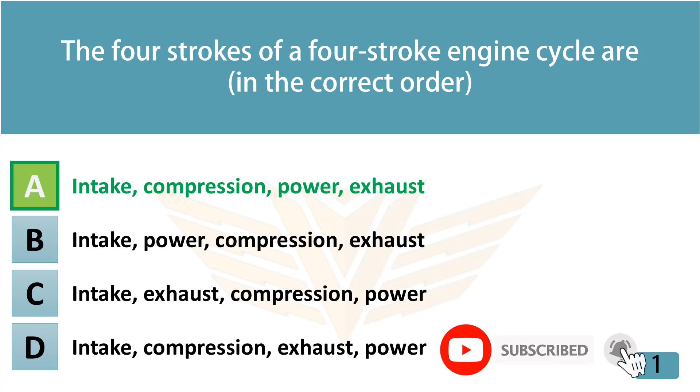You need to make a cut straight across a small cable. Which type of plier best fits your needs? A. Slip joint. B. Vise-grip. C. Channellock. D. Diagonal.

The correct answer is D. Diagonal. A diagonal plier employs jaws whose cutting edges join at a diagonal angle. Unlike scissors, they make a cut by wedging the material apart.

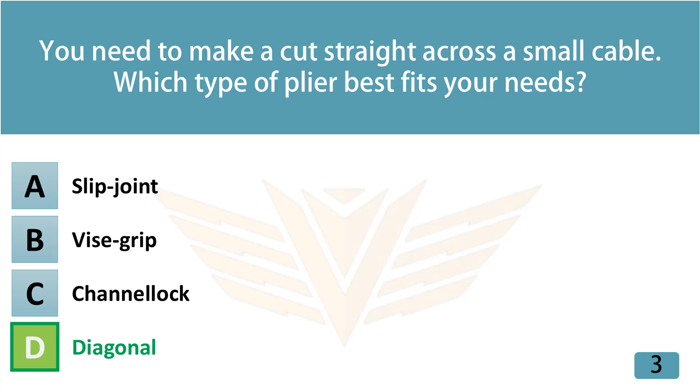A stick welder melts metal with the heat from: A. Applied pressure. B. A fuel-burning torch. C. An electric current. D. Electromagnetic forces.

The correct answer is C. An electric current. A stick welder is used in electric arc welding. This is a process that uses an electric current to form an arc between the machine's electrode and the metals to be joined. The heat from the current melts both the electrode and the base metals.

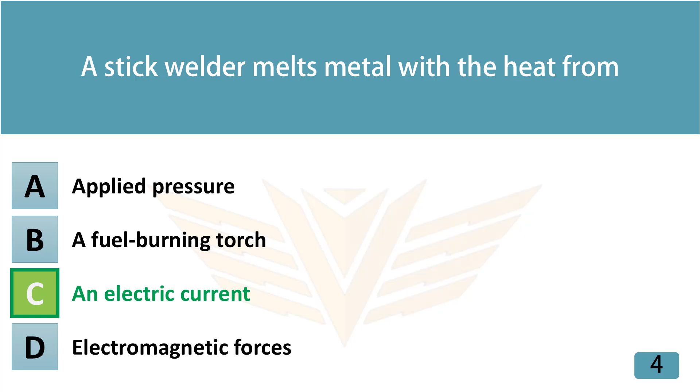A small hole that ensures drilling accuracy is best made by A. Drift. B. Cold chisel. C. Pin punch. D. Center punch.

The correct answer is D. Center punch. A punch is a tool with a pointed end and a blunt end that is usually struck by a hammer. A center punch is best used for making a starting mark or dimple on a surface.

The typical type of battery found in most vehicles is A. Lead-acid battery. B. Lead-alkaline battery. C. Lithium-ion battery. D. Nickel-cadmium battery.

The correct answer is A. Lead-acid battery. Lead-acid batteries are composed of lead plates in an electrolyte bath of sulfuric acid and water. While lead-based battery technology is dated, its power profile, dependability, and low cost make it ideal for automotive use.

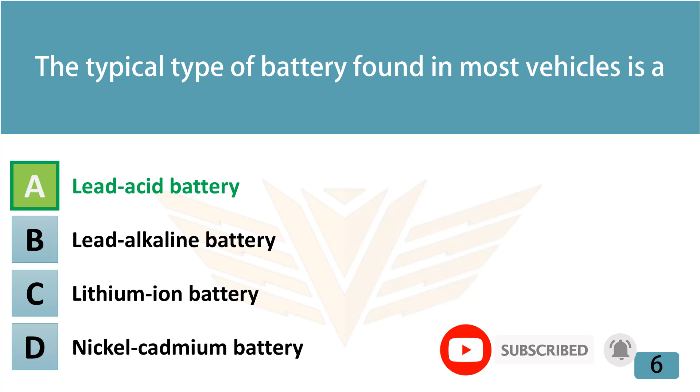During the compression stroke, the piston moves towards which position? A. BMC. B. TMC. C. BDC. D. TDC.

The correct answer is D. TDC.

This type of nut is easiest to tighten without tools. A. Wing. B. Lock. C. Acorn. D. Castellated.

The correct answer is A. Wing. A wing nut has wings on each side for hand-tightening ease.

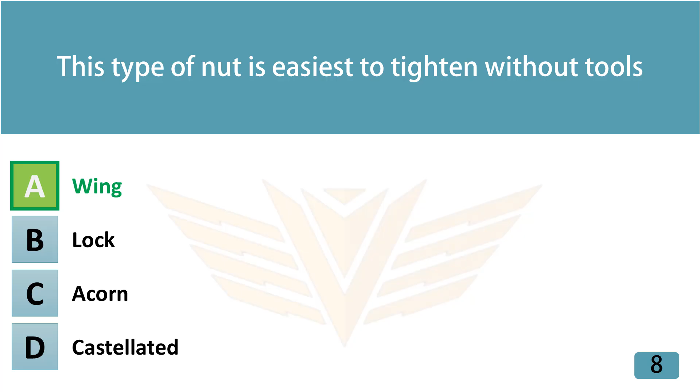Drill bits can be loosened and tightened using A. Bit. B. Flux. C. Chuck key. D. Bender head.

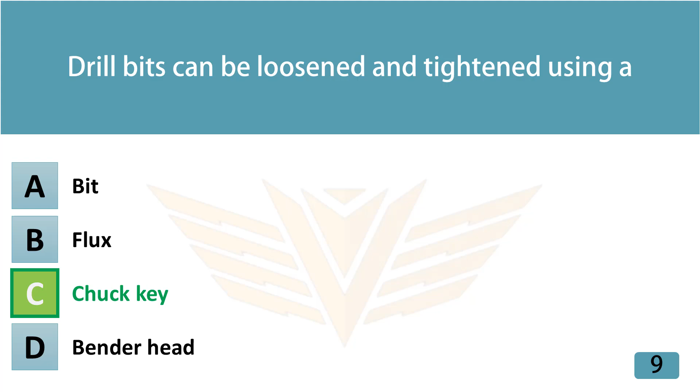The correct answer is C. Chuck key. The chuck is the part of a drill that holds the bit. A chuck key is used to tighten and loosen a drill bit. Handily, the chuck of some drills are now adjustable by hand and do not require a key.

The ECU is known more commonly as the vehicle's A. Brain. B. Heart. C. Nervous system. D. Ignition system.

The correct answer is A. Brain. The engine control unit, ECU, is the vehicle's computer. It is responsible for monitoring and controlling most of the vehicle's functions. It functions much like a brain.

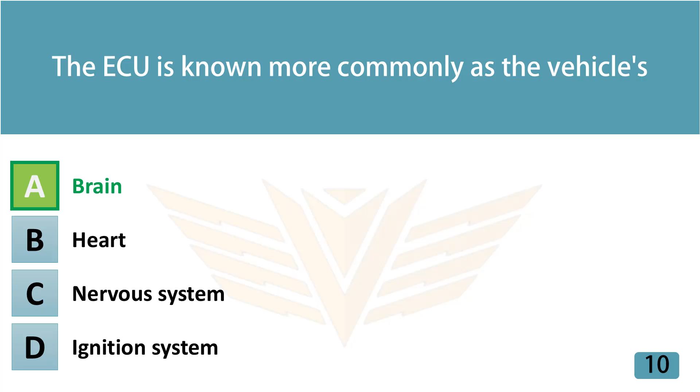Where is oil held when it isn't lubricating the system? A. The oil pan. B. The oil filter. C. The oil pump. D. The oil gallery.

The correct answer is A. The oil pan. The oil pan is where oil drains to. It is the reservoir. When the car is running, the oil pump draws oil out of the pan into the oil galleries.

How does an increase in pressure affect the coolant's boiling point? A. Decreases it. B. Increases it. C. Does not affect it. D. Any change in pressure triggers boiling.

The correct answer is B. Increases it. The boiling points of liquids are increased with increased pressure. And conversely, liquids boil much more quickly at high altitude, like at the top of Mount Everest, and can leave boiled foods uncooked.

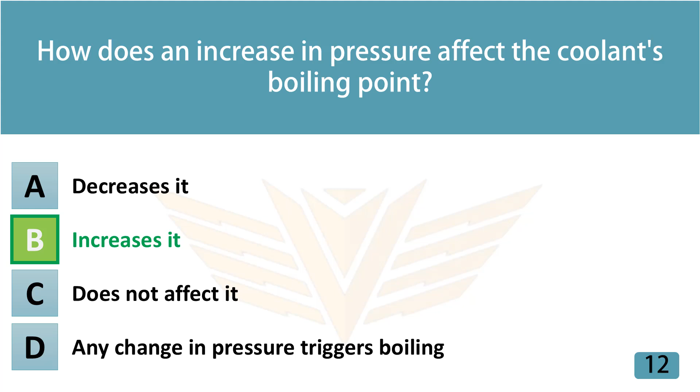Your woodwork has a slightly uneven plane. Which tool should you use to correct the problem? A. A rasp. B. A file. C. A chisel. D. A plane.

The correct answer is D. A plane. A plane is a tool that flattens, reduces the thickness of, or smooths the surface. This is generally done through the use of an angled blade.

What is the purpose of a fuel rail? A. Controls engine speed. B. Supplies fuel to the fuel injectors. C. Distributes air to the intake ports. D. Filters contaminants from the fuel.

The correct answer is B. Supplies fuel to the fuel injectors. The fuel rail is essentially a pipe that delivers fuel to each fuel injector in an engine.

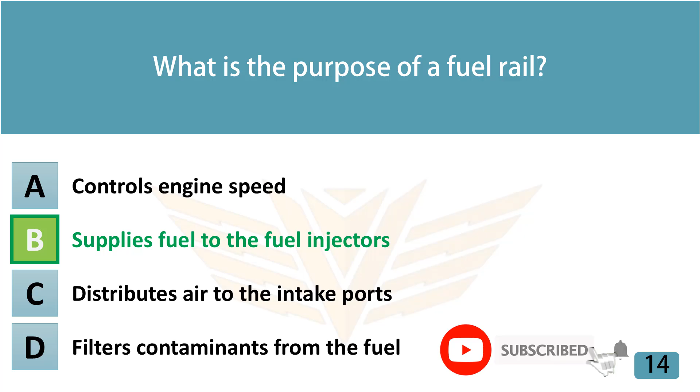Making large, wider than 1/2 inch, holes in wood is called A. Nailing. B. Boring. C. Drilling. D. Screwing.

The correct answer is B. Boring.

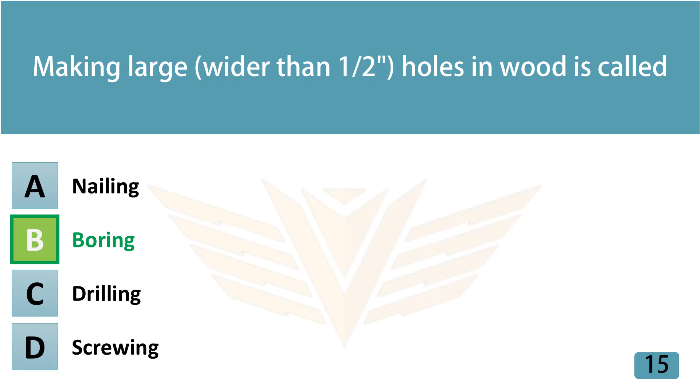Which of the following is true of a powered miter saw? A. The blade is circular. B. The blade is embedded in a table. C. To make a cut, one slides the material towards the blade. D. It is vital to use a coolant.

The correct answer is A. The blade is circular. A miter saw is a powered saw with a circular blade that sits on top of a table or bench. It is best for making quick, accurate crosscuts.

Automatic transmissions transmit engine torque to the transmission via A. Torque case. B. Torque axle. C. Torque shaft. D. Torque converter.

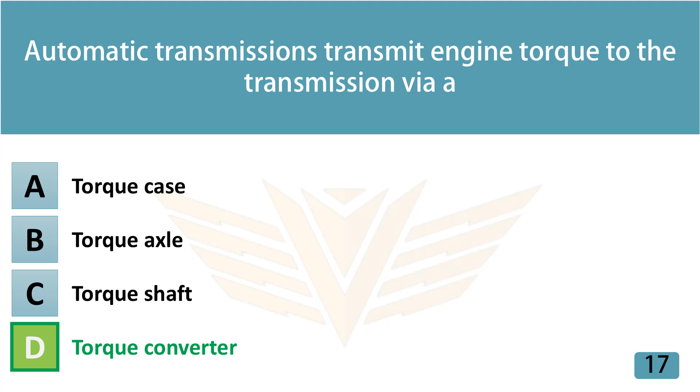The correct answer is D, torque converter. The alternator is driven by the engine's A. Pistons. B. Camshaft. C. Crankshaft. D. Intake valve.

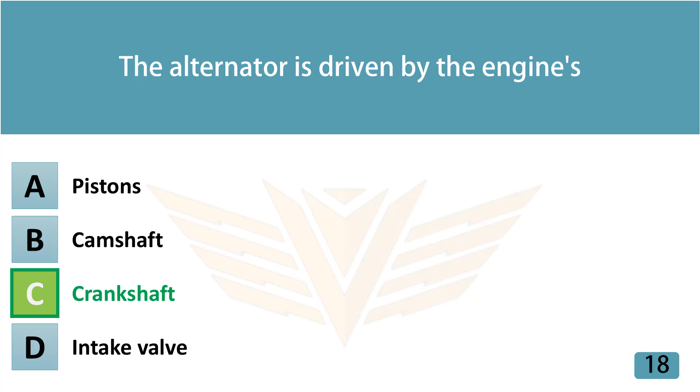The correct answer is C, crankshaft. The battery charges while the car is running. This is because the crankshaft in the engine powers a belt that powers the alternator.

When accurate measurements of small distances are needed, it is best to use A. Caliper. B. Micrometer. C. Spirit level. D. Tape measure.

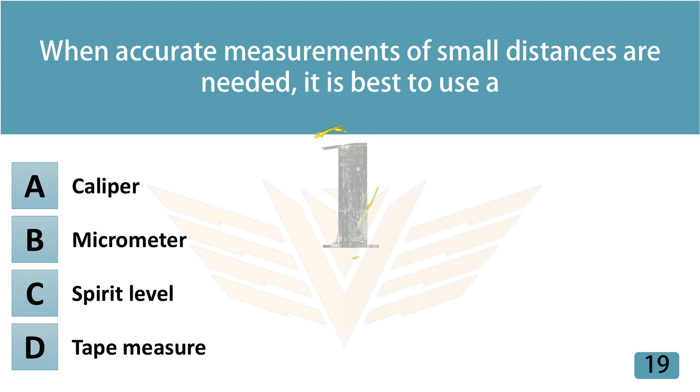The correct answer is B, micrometer.

The best method for cleaning a surface prior to soldering is to use A. Flux. B. Stinger. C. Filler rod. D. Core solder.

The correct answer is A, flux. Fluxes are chemical agents used to clean a surface before soldering.

A C-clamp is tightened with the A. Turning of a screw. B. Force of a lever. C. Use of a pulley. D. Rotation of a wheel.

The correct answer is A, turning of a screw. A C-clamp is powered by a simple machine, the screw. When the screw is turned, it tightens or releases the pressure of the clamp, either holding together pieces of a project or releasing them.

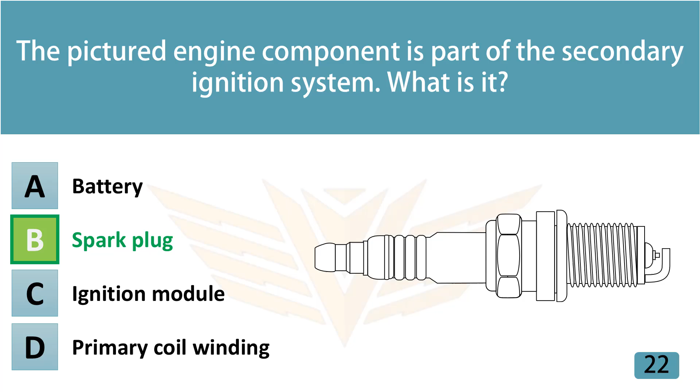An inside caliper measures A. Whether a surface is horizontal. B. Whether a surface is vertical. C. The external size of an object. D. The internal size of an object.

The correct answer is D, the internal size of an object.

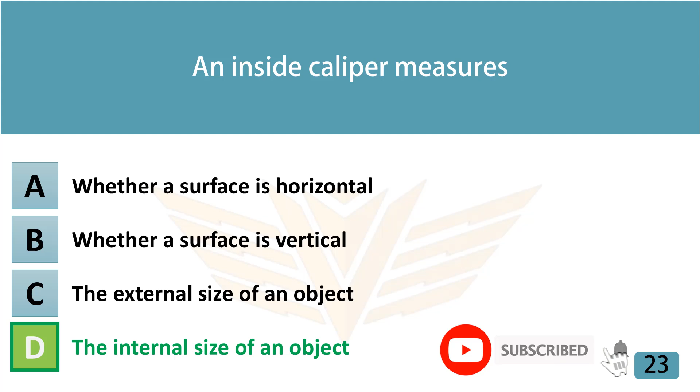The coil wire in an ignition system A. Times the spark. B. Generates the signal that operates the ignition module. C. Transmits voltage from the distributor cap to the spark plug. D. Transmits voltage from the coil winding to the distributor cap.

The correct answer is D, transmits voltage from the coil winding to the distributor cap. The coil wire moves a high amount of voltage from the secondary coil winding to the distributor cap. From there it is directed to each cylinder in the engine.

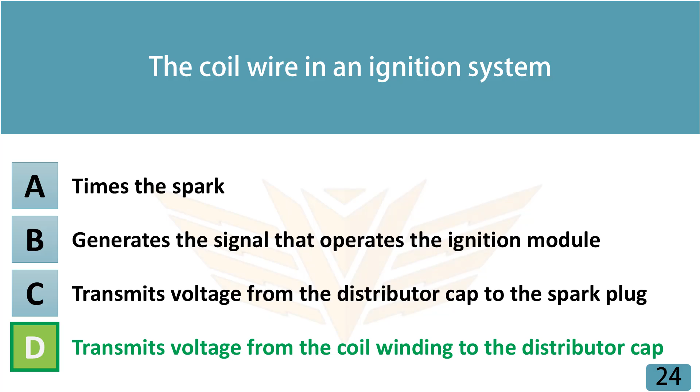Soldering differs from welding in that it A. Requires a torch. B. Creates a stronger bond. C. Requires a higher temperature. D. Does not melt the workpieces.

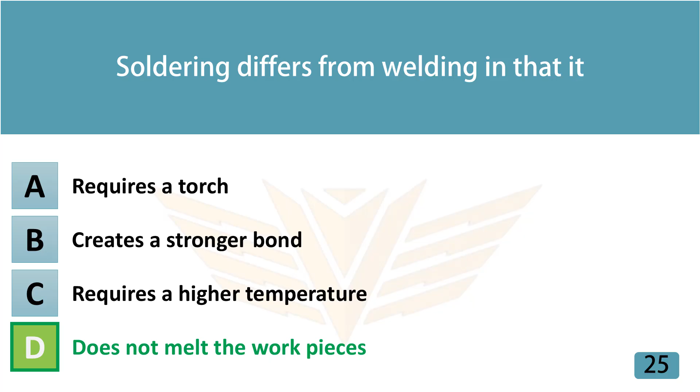The correct answer is D, does not melt the workpieces.

The air-fuel mixture is determined by your car's A. ECM. B. Fuel filter. C. Exhaust manifold. D. Fuel injector.

The correct answer is A, ECM. While cars used to use carburetors to ensure that the air-fuel mixture was correct in its ratio, modern vehicles use an ECM, electronic control module, to determine the optimum air-fuel mixture.

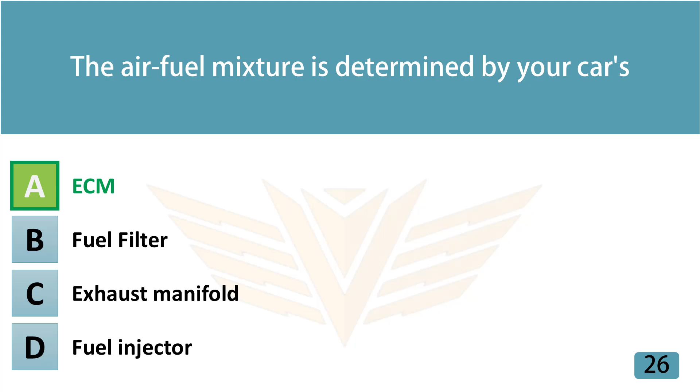Engine oil viscosity can best be described as A. Kinetic energy. B. Heat resistance. C. Resistance to flow. D. Adherence to flow.

The correct answer is C, resistance to flow.

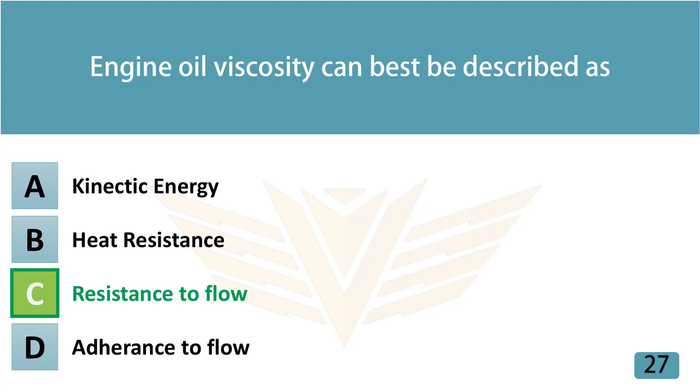Transmit torque from the engine. B. Transmit torque to the drive shaft. C. Match engine speed to the desired vehicle speed. D. Split the power between front and rear drive axles.

The correct answer is C, match engine speed to the desired vehicle speed. The transmission is responsible for matching the engine speed to the speed desired by the driver and vehicle.

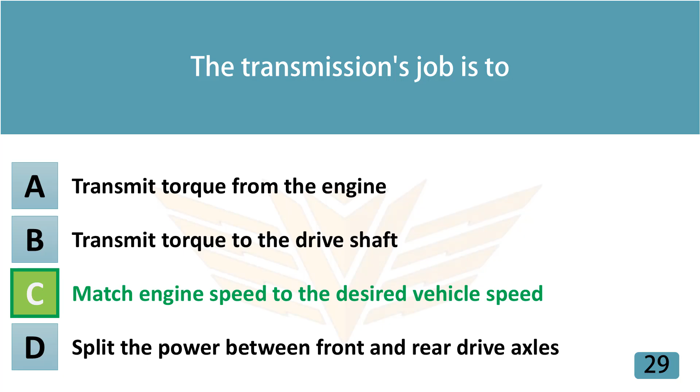Which type of hand saw is best for cutting metal? A. Rip saw. B. Back saw. C. Hacksaw. D. Coping saw.

The correct answer is C, hacksaw. A hacksaw would be the best choice for cutting metal. A hacksaw generally has a C-shaped frame that holds the blade tight and varies in the number of teeth per inch.

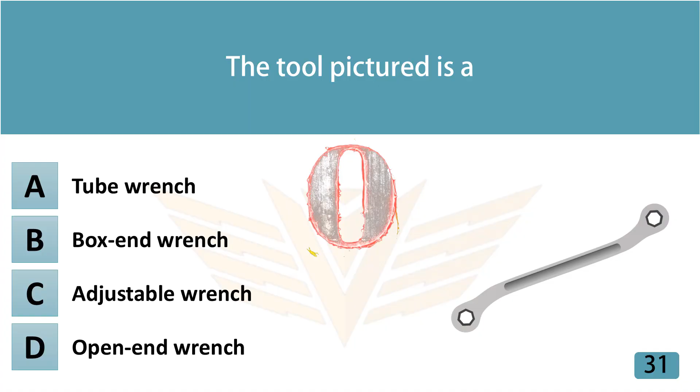The correct answer is B, box-end wrench. By applying torque, a box-end wrench, in contrast to an open-end wrench, loosens a fastener using a ring-shaped opening.

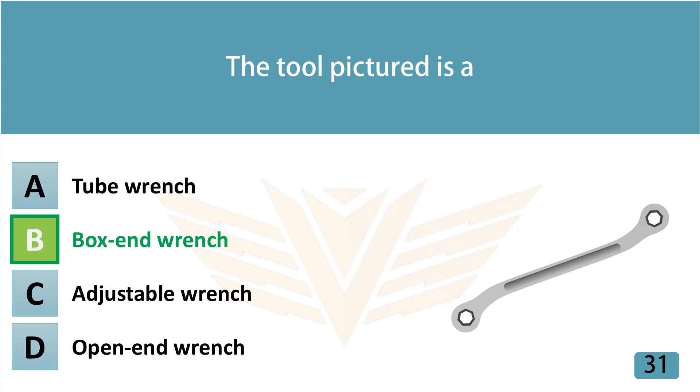A wrench is used to apply what to a fastener? A. Torque. B. Inertia. C. Tension. D. Spring.

The correct answer is A, torque. Wrenches use leverage to apply torque, or twisting force, to a fastener.

The purpose of a muffler is to A. Convert toxins. B. Reduce noise. C. Funnel exhaust out into the air. D. Send gas into the catalytic converter.

The correct answer is B, reduce noise. The muffler is a soundproofing device that muffles the sounds of the engine and then sends exhaust to the tailpipe.

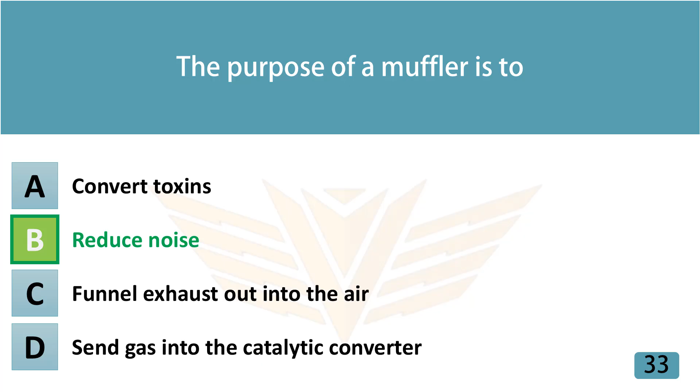The correct answer is B. To loosen or tighten a bolt, you should use a socket that matches exactly the measurement of the bolt.

In order to level a surface across a plane, one might use: A. Line level. B. Water level. C. Bullseye spirit level. D. Tubular spirit level.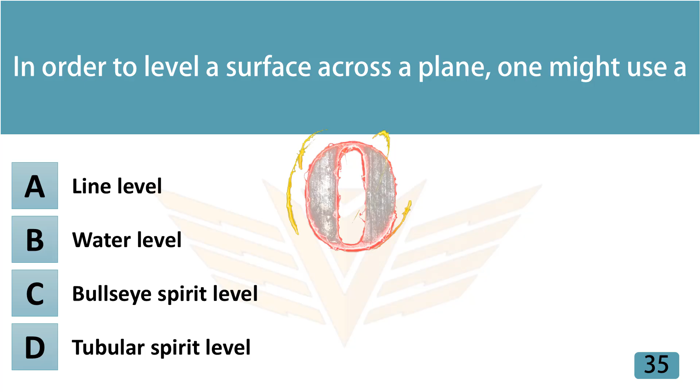The correct answer is C, Bullseye spirit level. A bullseye spirit level is a circular device filled with liquid. The position of a bubble in the liquid serves to level your surface across a plane. When the bubble is in the bullseye, the surface is level in 2 dimensions.

A rasp is used to: A. Make deep cuts. B. Make small holes. C. Smooth coarse surfaces. D. Fix pieces together.

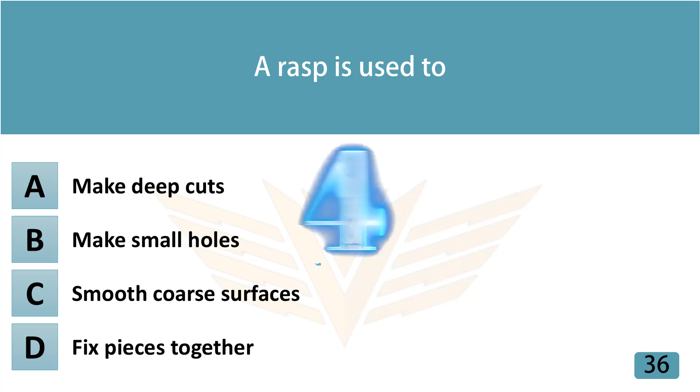The correct answer is C, smooth coarse surfaces.

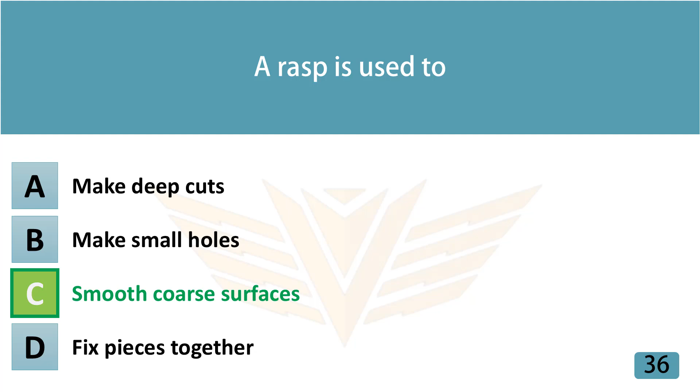Brakes work by converting the car's kinetic energy into: A. Heat energy. B. Electric energy. C. Elastic energy. D. Chemical energy.

The correct answer is A, heat energy. The movement of the car is decreased when pressure is put on the tires. Friction turns kinetic energy into heat energy.

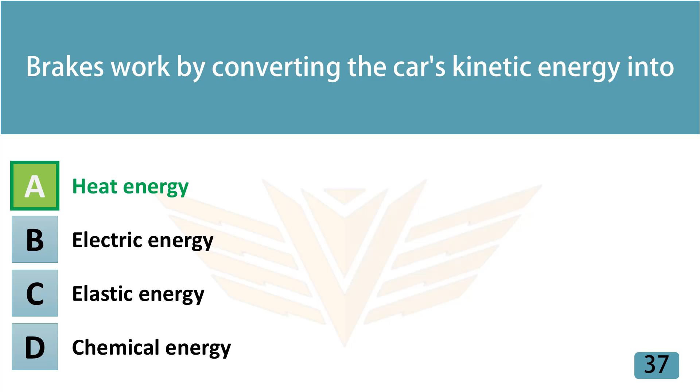Brake systems are hydraulically operated, meaning that they are operated by: A. Heat. B. Fluid. C. Electricity. D. Magnetism.

The correct answer is B, fluid. A car's braking system is controlled by the movement of pressurized liquids.

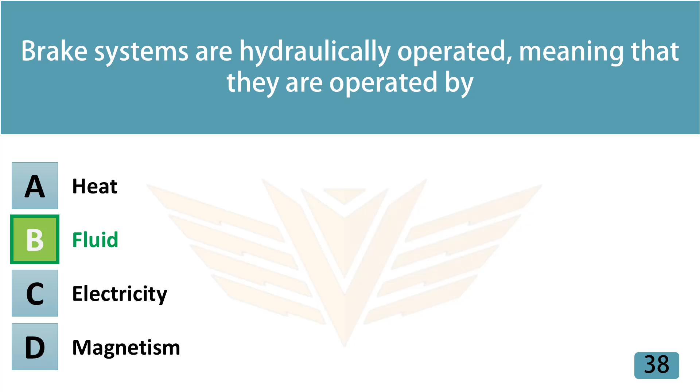Welders using the electric arc welding method wear face shields to protect themselves from: A. Gamma radiation. B. Ultraviolet radiation. C. X-ray radiation. D. Microwave radiation.

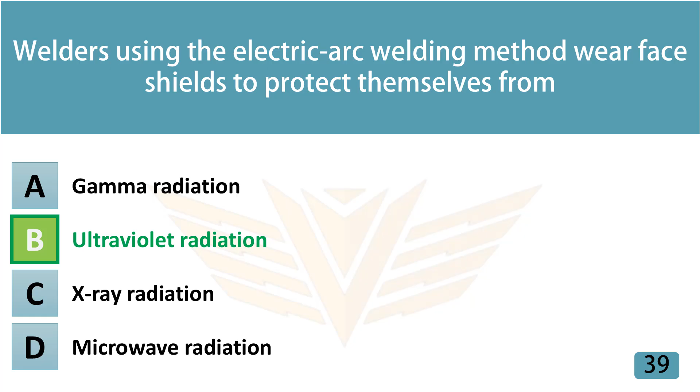The correct answer is B, ultraviolet radiation. During this process, the electric arc gives off a dangerously high-intensity light, ultraviolet light. Welders must use protection or risk burning their skin and eyes.

On which popular type of tire are the cord plies arranged at 90 degrees to the direction of travel? A. Bias. B. Radial. C. Solid. D. Belted bias.

The correct answer is B, radial.

An engine's job is to convert fuel into: A. Heat. B. Exhaust. C. Motion. D. Potential energy.

The correct answer is D, potential energy. The job of an engine is to convert fuel into potential energy. The potential energy is transmitted from the engine to the transmission, which is turned into motion once applied to the wheels.

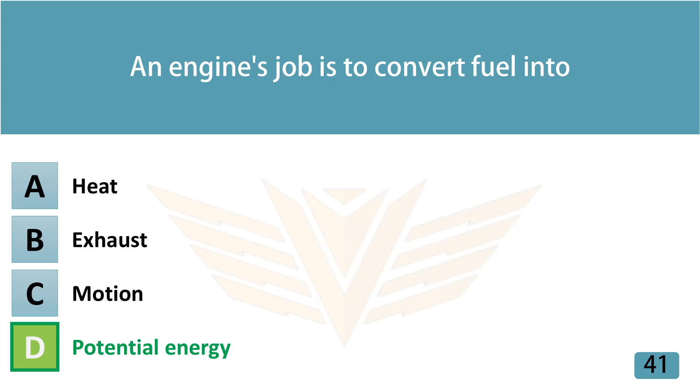What is the most popular cylinder arrangement for 6- and 8-cylinder engines? A. Inline. B. S-type. C. V-type. D. Horizontally opposed.

The correct answer is C, V-type. A V-type engine is the most popular engine for 6- and 8-cylinder engines. It is shaped like a V when viewed along the axis of the crankshaft.

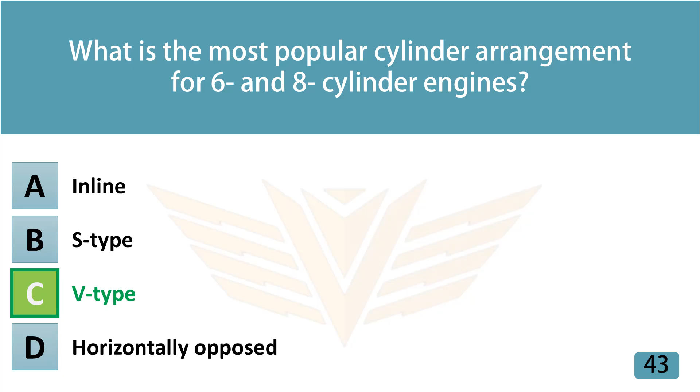The type of screwdriver pictured is: A. Torx. B. Phillips. C. Flat tip. D. Robertson.

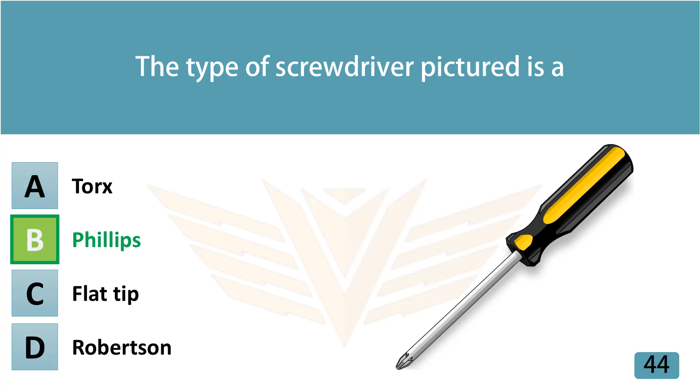The correct answer is B, Phillips. A rubber mallet would be best used to: A. Drive nails. B. Shape metal. C. Remove screws. D. Remove fragile parts.

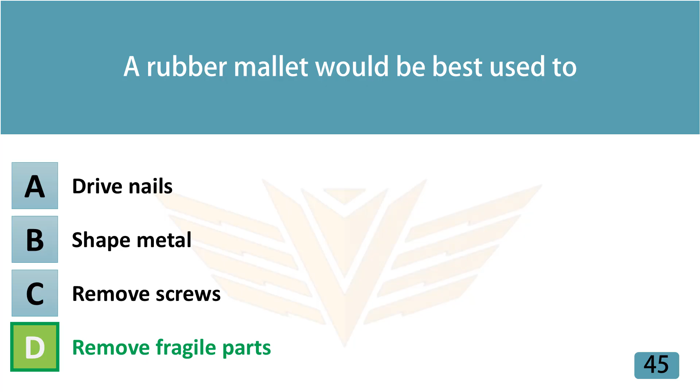The correct answer is D, remove fragile parts. Which of the following types of pliers is pictured? A. Lineman. B. Needle nose. C. Diagonal cutters. D. Adjustable joint.

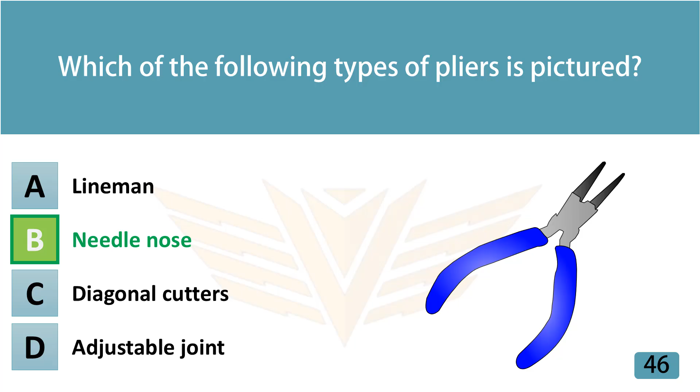The correct answer is B, needle nose. Because of their long shape, needle nose pliers are useful for reaching into tight areas and working with delicate components. They often also have a wire cutter built into them.

Which automotive system uses the following components: battery, distributor, coil wire, and spark plugs? A. Exhaust system. B. Braking system. C. Ignition system. D. Engine cooling system.

The correct answer is C, ignition system. A vehicle's ignition system is divided into low-voltage and high-voltage subsystems known as the primary and secondary ignition systems. These systems require a battery, a distributor, coil wires, and spark plugs to operate.

This device dampens the up and down movements of the wheels. A. Distributor. B. Ball joint. C. Wheel hub. D. Shock absorber.

The correct answer is D, shock absorber. The shock absorbers absorb shock impulses. They generally convert the kinetic energy into heat energy, which is allowed to dissipate.

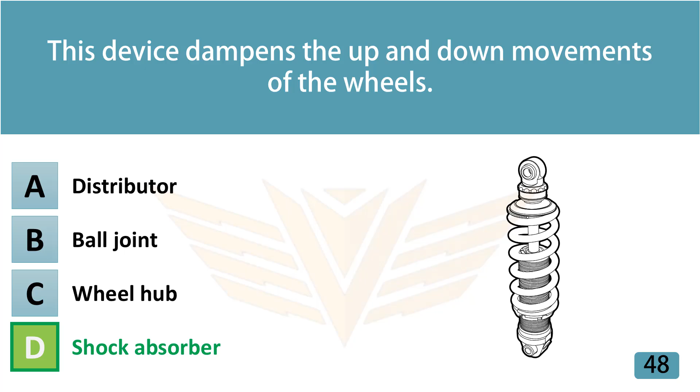The pictured tool is: A. Pipe wrench. B. Ratchet wrench. C. Allen wrench. D. Socket wrench.

The correct answer is A, pipe wrench. A wrench is a tool used to loosen or tighten a fastener. A pipe wrench is an adjustable wrench with serrated jaws that make it easier to grip soft pipes. It is similar in appearance to a monkey wrench.

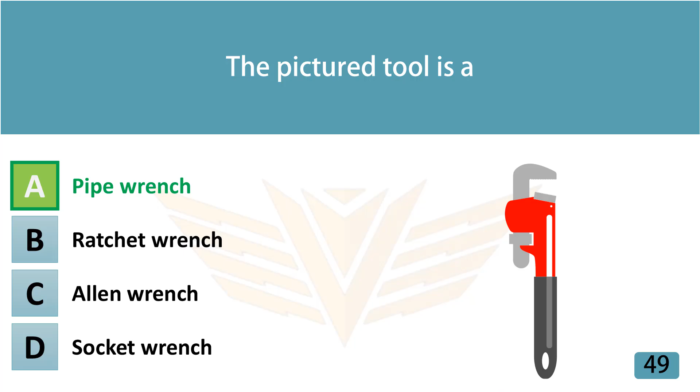When an ABS or anti-lock brake system is in operation, the driver will feel: A. Nothing. B. A pulsing of the brake pedal. C. A release of the brake pedal. D. A depression of the brake pedal.

The correct answer is B, a pulsing of the brake pedal. An anti-lock brake system is a safety system that prevents car wheels from locking up. This helps a driver avoid uncontrolled skidding and maintain control of the vehicle.

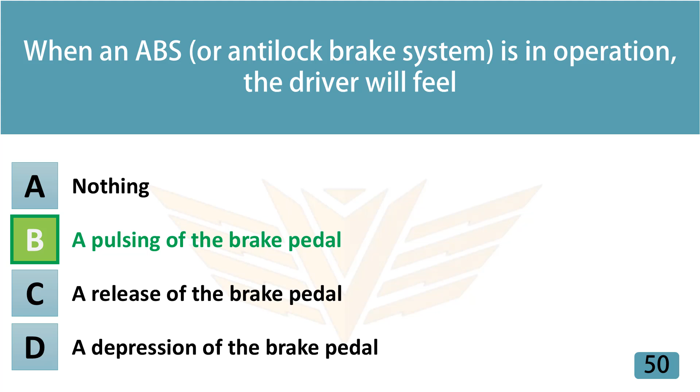The system works in the following manner: sensors notice when one wheel is about to lock up, usually when it is decelerating rapidly. Then, pressure is reduced to that brake, then increased, then decreased, etc. This causes the pulsing feeling in the brake pedal. This ensures that the tire slows down at the same time as the car and does not lock up.